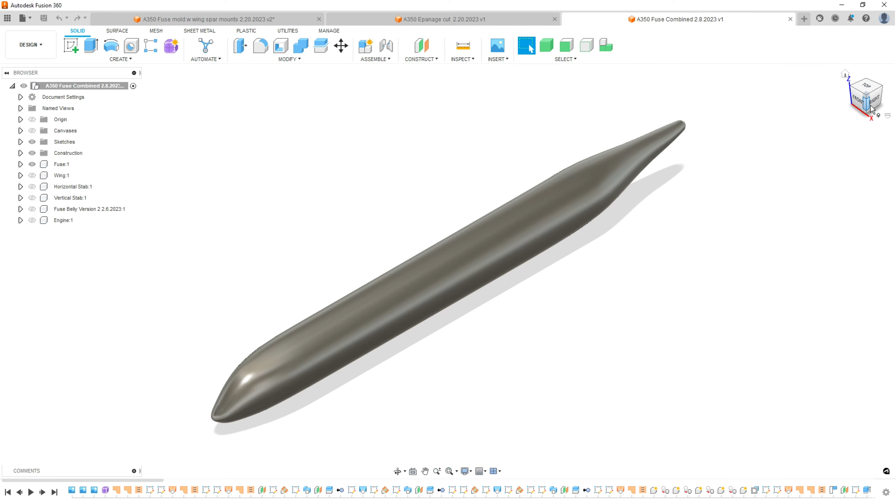Okay, so I've had some questions about my molds. I'm going to show you just how I did my fuse mold real quick. I think it came out pretty good. Now remember, this is my first time doing this, so I'm learning as I go.

But this is basically what I did to get this fuselage to the point where it's at. So I took my fuselage, opened it up, just have a solid body right now of the fuselage to make the mold, to make the shape of it. So I start a sketch here on the right plane, and then I just kind of center everything.

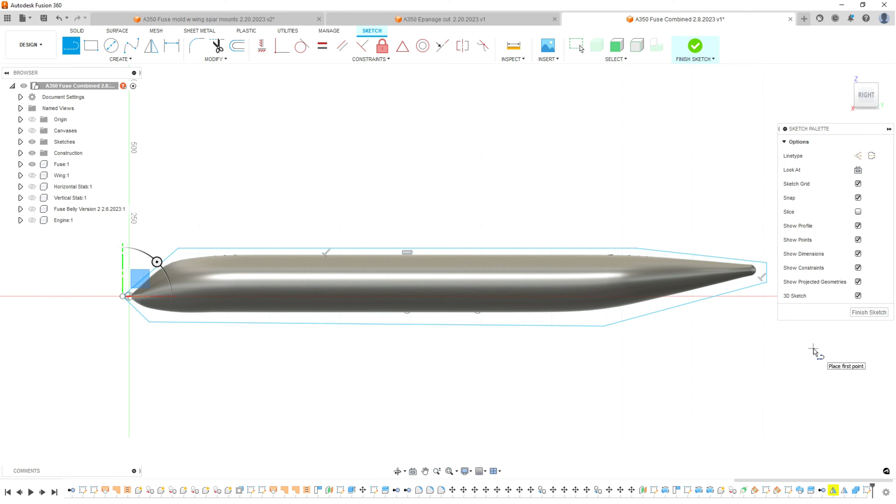And what I'm going to do now is draw a line around the fuselage. Now, you don't want to get too close, especially on the sides, because you won't have enough room. So keep that in mind. You'll see that in the next step.

So basically, we just draw this line. Now we've got a closed surface. Now we'll finish the sketch, and we'll extrude this shape.

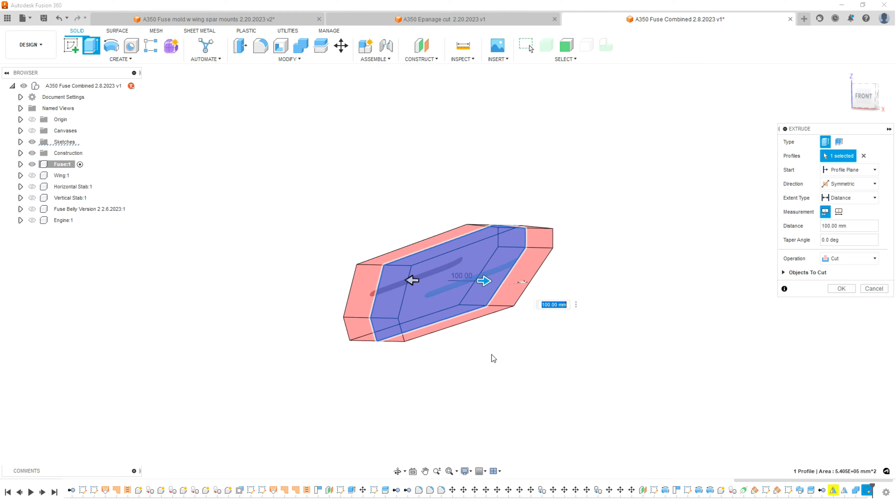Hit E for extrude on the keyboard, and then I'm going to go to symmetric so that it pulls out on both sides at the same time. And then here you'll see as I drag out, it's going to default to cut, and there's also a little bit of fuse left, so you can pull that out a little bit more.

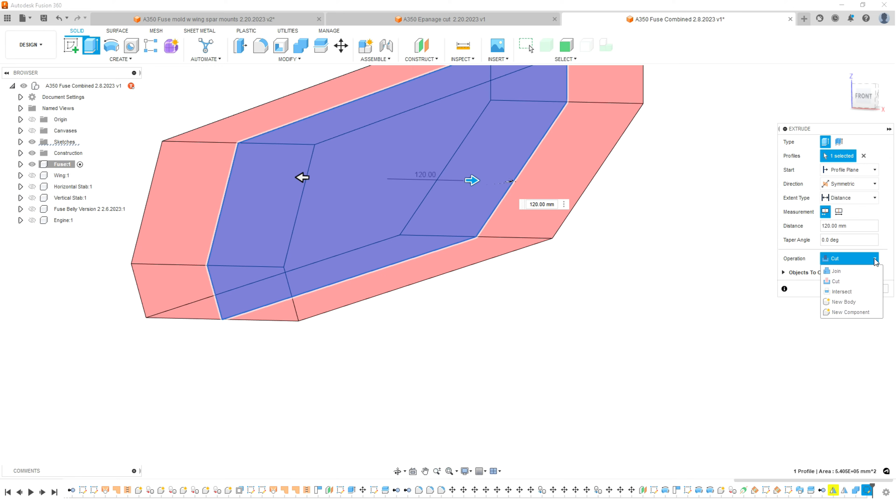And remember, this is where you have to leave yourself enough because you have to go out. So I'm going to go out to 120. And now you've got it.

Now you're going to want to go to new body for your mold because it defaults to cut. So you don't want to cut this. You want to make a new body.

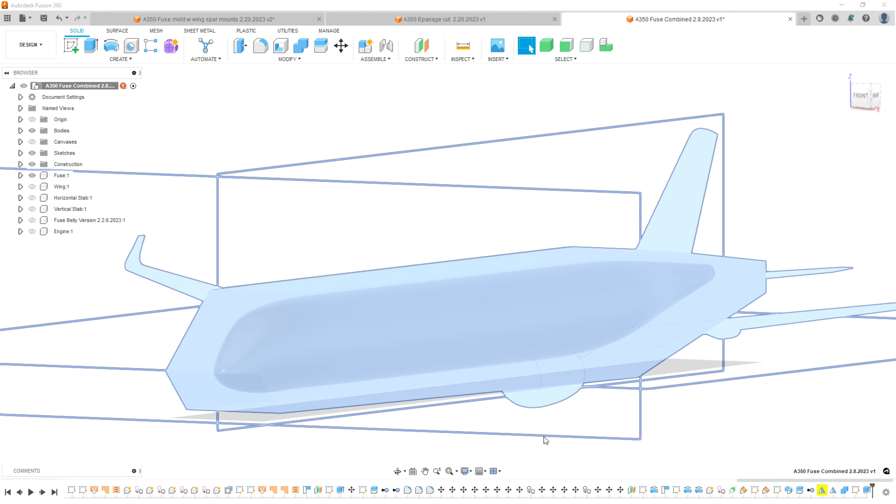And there you go. Now you've got your mold, and what you can do is center it, and then you can go up to the component tree and reduce the opacity control. Then you can see the fuse on the inside, so you'll know that your mold worked because you can see the outline of the mold and you can see the fuse.

And that's basically it. Now what you're going to want to do is put your construction planes in so that you can slice this thing up however you want to. I did a left and right side. You don't have to do it that way.

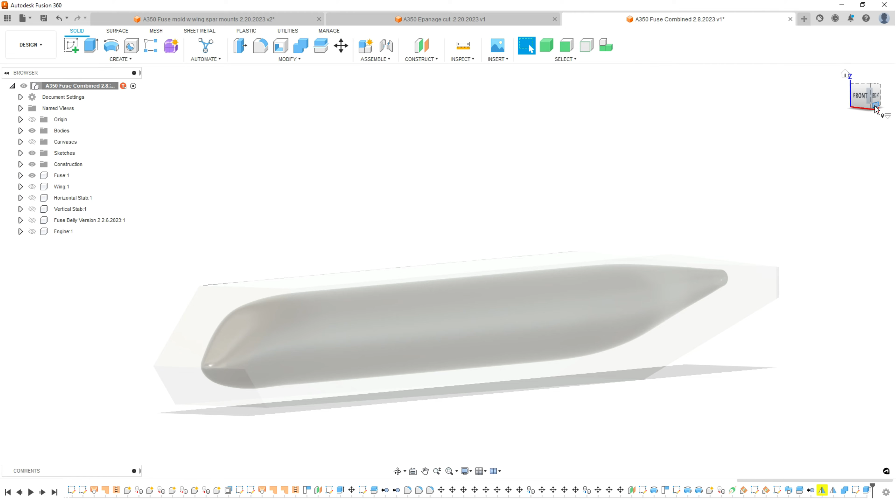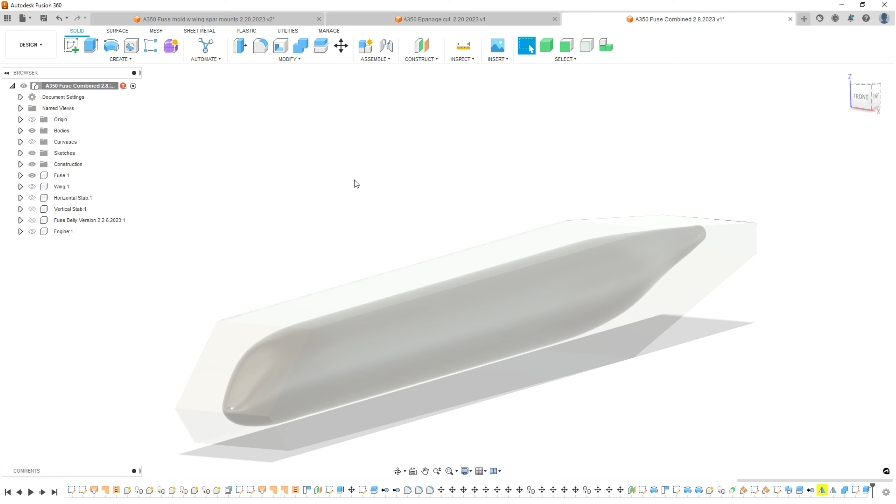And it came out pretty good. I mean, my 3D prints look good so far. I'll hopefully be laying up the left side of the fuselage in the next couple days as I'm printing. They're 40-hour prints.

And then one more step, you can use the combine tool to cut out the inside of the fuselage. So you'll use that combine tool, and it allows you to remove the fuselage and cut it from the mold. You also want to check keep tools as you do this.

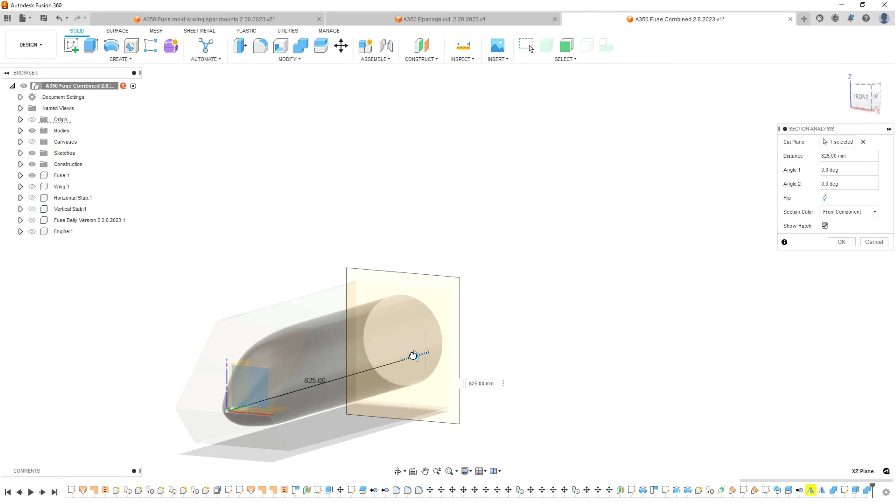After you select, get the operation to cut, you want to keep that fuse. So there, now it's done.

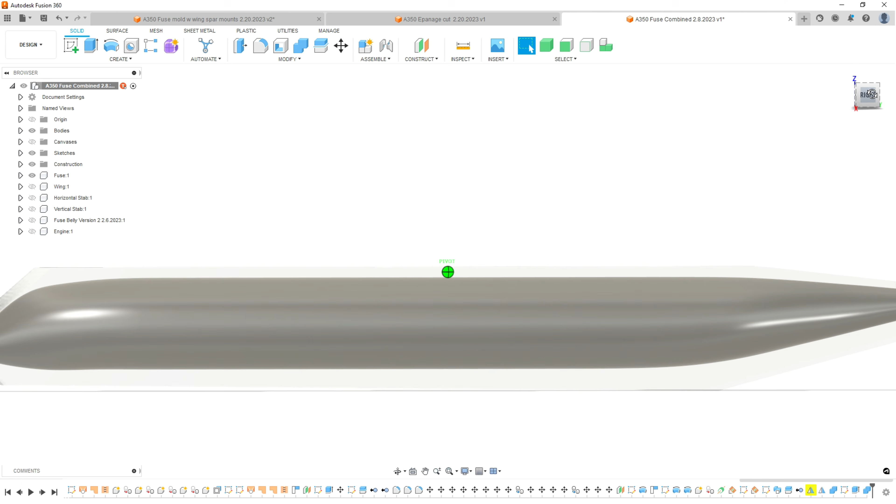Now you can do a section analysis on your front plane. And from back, we'll spin this around here. And then you'll see, so there, you can tell your section analysis will show that your mold cut out. It's exactly how you want it.

And now, the only thing left to do is, again, put your construction planes in. That's what I used. And then slice up your fuselage into however big your 3D printer molds are. I mean, the 3D printer specs are.

So that's how I did that mold, and I'm going to do that pretty much for everything that I'm going to be doing 3D printed molds for.